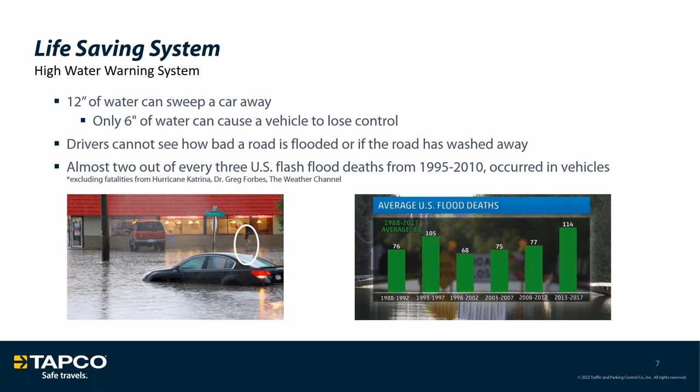We see water-like concerns happening in multiple areas and multiple types of entry points to the roadway. Barrier islands, areas of inadequate drainage, underpasses and overpasses, any low-lying condition along the roadway is a potential high water hazard. These areas not only cause vehicular damage and are maintenance concerns for those managing infrastructure.

Owning some of these areas within your municipality offers limited EMS response time, limited response time from law enforcement. There's costs associated and maintenance associated to the deployment of static measures like traffic cones and gates. Oftentimes we're seeing municipalities hit with higher insurance rates trying to manage the events that occur specifically in these areas.

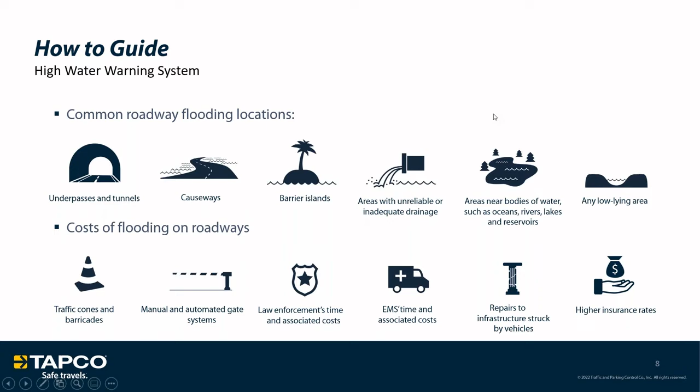To offset some of these concerns, TAPCO has developed a mitigation tool we call our high water warning system. These warning systems are countermeasures that can work conjunctively with cones, gates, barriers, and static measures, but also operate as isolated, conspicuous warning systems that work autonomously to alert drivers of water entering the roadway and a plausible concern for them as they engage with those types of events. They can also include automated gate arms and other advanced features that further mitigate drivers from entering areas of high water concern.

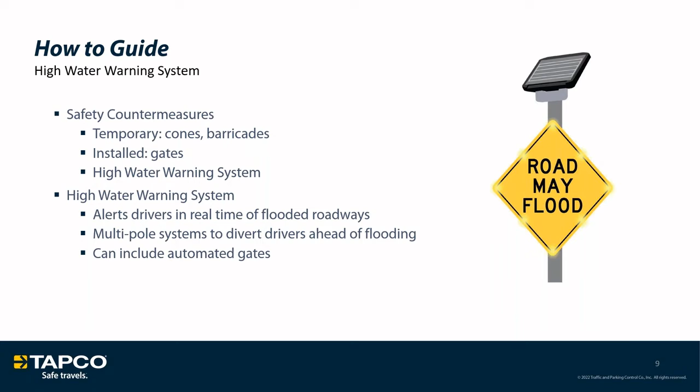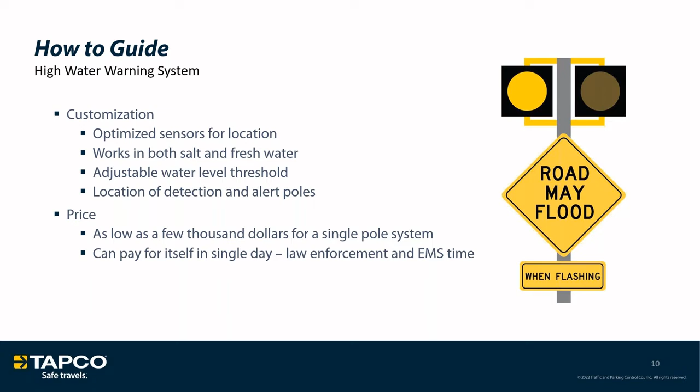These systems are completely customizable, allowing the deployment of a sensor right-sized to the specific application, working in both fresh and salt water with adjustable water levels associated to them. We can make sure that we're concerning ourselves with detection of water entering a roadway specific to what is the municipality's direct concern, and we can work within the confines of whatever price is best discerned for that particular project. These systems are right-sized to fit the needs of the municipality and make sure that we're addressing the concerns that are most important to that particular end user.

TAPCO's high water warning system is generally comprised of 2 separate pole types, as both a warning portion of the system and a detection portion of the system. As you can see in the graphic to the right, there is 1 pole generally stationed at the area of water intrusion to the roadway. This particular pole will have a sensor on it and be either powered via a solar panel and solar engine or available AC power. Communication from that pole to the associated warning poles will be done via either a hardwire communication or the available TAPCO 900 megahertz frequency hopping radio. That radio trigger will illuminate warning signs that alert the driver specifically that they're entering an area of concern.

Road may flood warning or warning messages will be displayed on those signs, or any particular type of warning message that would be pertinent to that area of concern. TAPCO has the ability to offer fully customized signs displaying any warning message that would be pertinent to your particular use case.

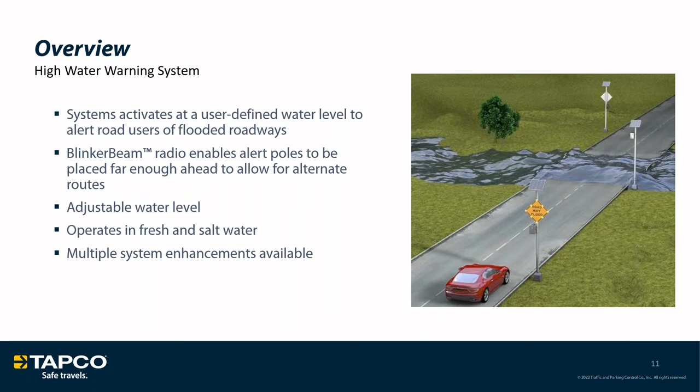In further detail for these poles and the way that the system is laid out, we're able to show a little bit more about the infrastructure layout. As I mentioned, there is at least one alert pole or warning pole associated to the system, and at least one detection pole associated to the system. Typically, TAPCO manages entry to that area of high water concern from multiple points and multiple angles. We know that a single road may have at least 2 entry points to that area of concern, but oftentimes municipalities are dealing with detection of a low-lying area with multiple inlets. Via the 900 megahertz radio network TAPCO provisions our system with, we can activate multiple warning poles without concern, managing every inlet to an area and mitigating drivers from entering hazardous conditions.

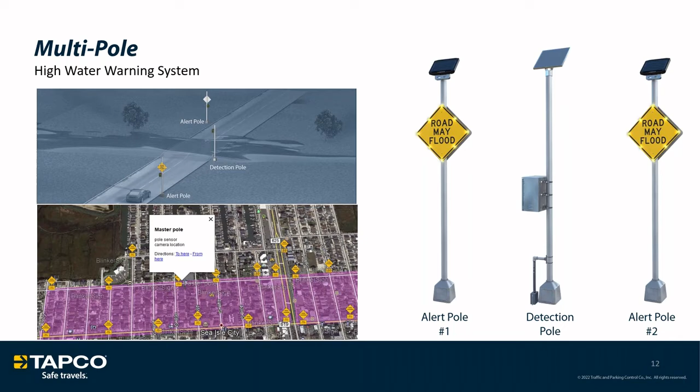TAPCO's sensor is housed in a flexibly deployable housing with a telescopic arm, stakes for mounting within the ground, and a fully enclosed container. This layout specifically allows us to manage water concerns at varying heights along the roadway, able to detect water at whatever the concern level happens to be for that particular municipality.

Oftentimes we're detecting water right alongside the roadway, but in some unique cases, we can understand based on trends and data and historical understanding of events that water of a certain height concern at a low-lying area adjacent to the roadway may be cause for the water to subsequently enter the roadway or cause other outlying concerns. Our ability to flexibly mount poles wherever that concern happens to be at varying heights and in varying layouts is giving us cause for early warning, giving us the ability to detect water as our earliest option to make sure that we're responding accurately to events as they occur.

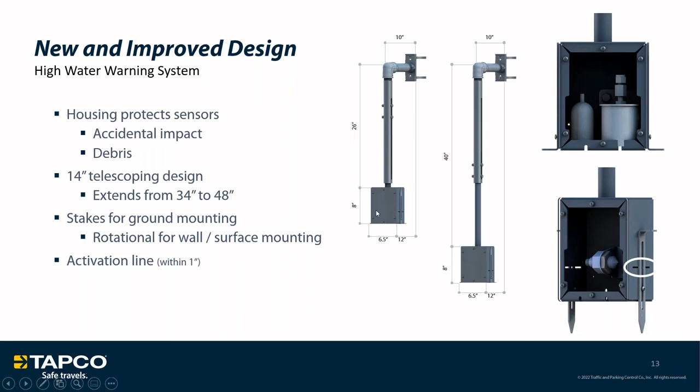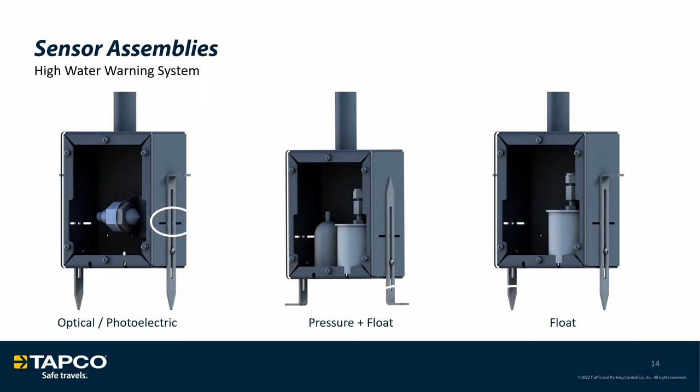TAPCO has 3 variations of our sensor for detecting water as it enters a roadway or as it enters our housing on our system. First, we have a photoelectric optical sensor, but we also offer a pressure float sensor and then the isolated float sensor. A little more detail regarding these sensors.

With our photoelectric sensor, we're able to measure the refraction of light as it enters the water, as it is under the water, and seeing that increased refraction of that light will trigger the system. This system is subject to some salinity from salt water, so it's best used in freshwater situations where any salt caking or developing on that sensor will be minimized. Additionally, we also have options specifically allocated for salt water using a mechanical float switch.

To address concerns regarding freezing or ice damming, TAPCO is able to use pressure switch options that help understand the variable pressure associated with water entering a chamber, and they work best in cold weather climates, working for salt water or fresh water all the same.

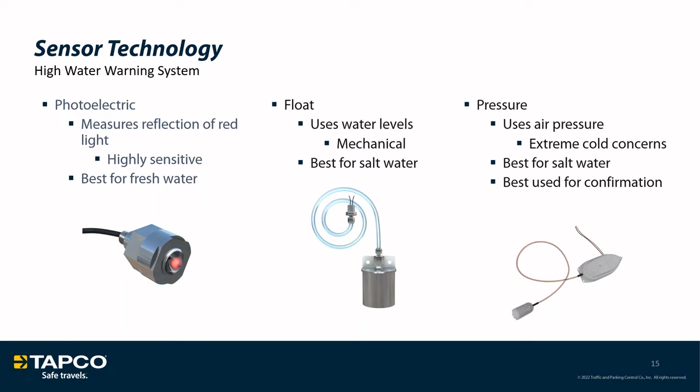This also helps mitigate concerns regarding contamination of water, if there should be debris or other things that accumulate within the system. Rightsizing our technology will use any one of these or a combination of sensors to make sure we're allocating a system best served for your particular project, addressing concerns about maintaining accurate and actionable detection, but also environmental factors that could compromise the system.

Available with the TAPCO system are a myriad of enhancements, specifically the ability to remotely activate and monitor these systems via connectivity where applicable.

We're interested in understanding the agency's adoption of this technology, and we would welcome a conversation regarding how to make this system as actionable and reliable as possible for those that aren't necessarily along the roadway. We want it to be managed remotely when possible, and to offer guidance about how the system is performing in its best possible state.

This can be done via TAPCO's proprietary BlinkLink software or with integration into existing IT infrastructure deployed within the municipality. Additionally, cameras and illuminators can offer visualization of these events, offering not only pictures, but also casting light onto the images to make sure we're seeing accurate depictions of what the continued change for high water looks like as that event progresses and as rains and other things continue to accumulate.

Lastly, we're able to integrate all of TAPCO's systems into connected vehicle infrastructure. We do this by offering an intermediary device that communicates from our 900 megahertz radio out to a roadside unit, should one be deployed. This simple add-on allows for conspicuous warnings associated with high water and other events to be displayed directly in the infotainment system inside of that vehicle.

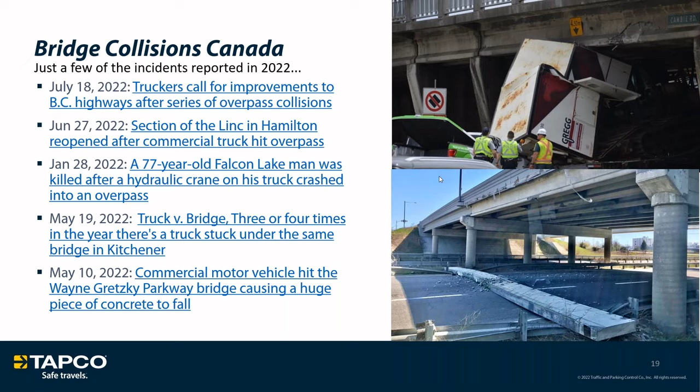So, of course, we realize that there is a problem with exactly everything that Mike just walked you through. Currently here in the US, we have about 10,000 annual bridge impacts nationally on a year-to-year basis. We do have over 600,000 bridges here currently registered, whereas I believe you have just shy of about 52,000 publicly registered there in Canada. 30 of our states have recognized bridge impacts as a major problem, but of course overheight impacts are a global issue.

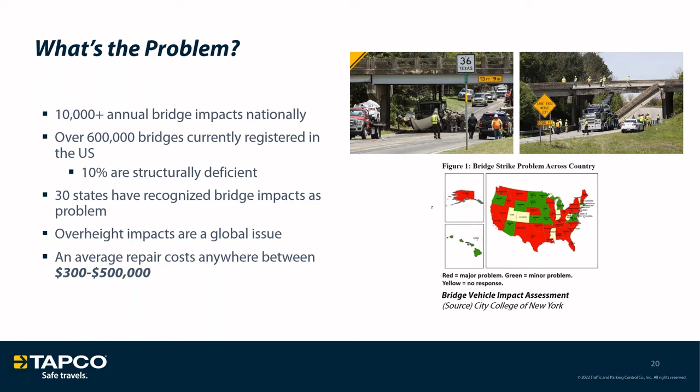There's bridges everywhere, really causing an issue with repair costs, which could be anywhere from $300,000 to $500,000 on average.

The reason being is that about roughly 40% of truck drivers that we had surveyed had admitted to not knowing the specific height of their own truckload. So a lot of them are using passenger-based off-the-shelf navigation systems, not super familiar with them or how to utilize them. Lack of route planning.

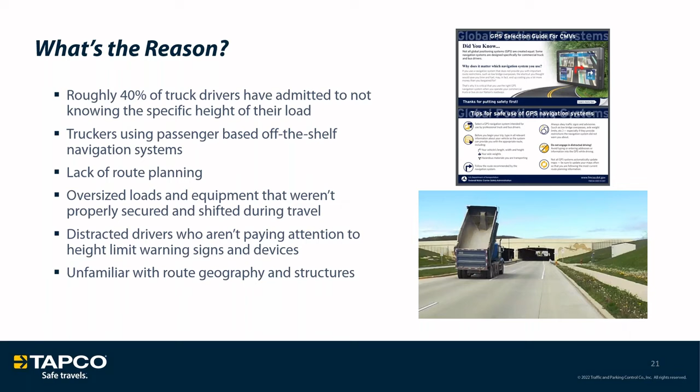They may have oversized loads and equipment that weren't properly secured and could have shifted during their travel. Sometimes they're just merely distracted, especially if they're not paying attention to the height limit warning signs, or if they take the same route repetitively, sometimes those static signs can just become white noise. Or maybe they're just unfamiliar with the route geography and the structures in general.

But this could cause major impact consequences. So of course, the most important is injury or loss of life to either the driver or the nearby motorists. The damage to the infrastructure, like we discussed, the interruption of commerce, which now that truck is missing their deadlines for delivery, increasing shipping costs, delaying the travel times, wasting fuel, money, resources.

Of course, the local evacuations that are required. So if those trucks are carrying hazardous or harmful substances that are released during the impact, then that creates, of course, a new issue all in its own. The company and driver fines that come along with it, and then of course the increases in insurance premiums, and then the costs of those goods.

TAPCO's preventative measure is our overheight warning system with either flashing blinker signs or blinker beacons. 73% of the states here that have installed an overheight detection system have seen a reduction in the frequency of their infrastructure strikes. So the photo example that you see off to the right, this is a flashing blinker sign, where it reads, of course, the height of the upcoming bridge or structure. And it also specifically highlights overheight when flashing.

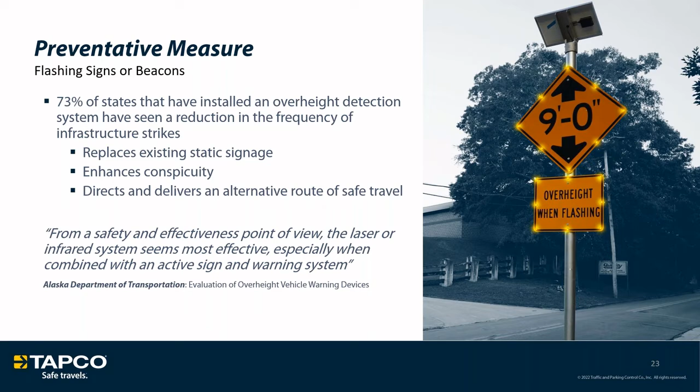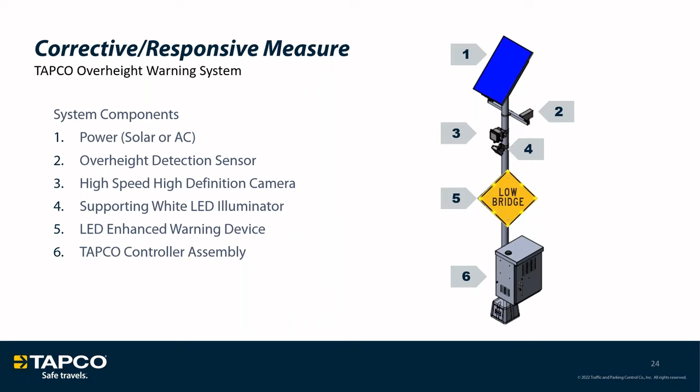The supporting white LED illuminator really helps to highlight that camera system if deployed in nighttime conditions. The next down is, of course, that LED enhanced warning device, whether we utilize a blinker sign or blinker beacons. And then at the bottom there is the TAPCO controller assembly, where, of course, the brains of the system are housed.

So we utilize a dual beam configured overheight infrared sensor. It does provide directional logic, so the vehicle would need to break the beam directionally, one before the other, in order to trigger the system. That really reduces the false triggers that could be deployed with potentially a single beam sensor. It does offer multi-lane compatibility, so you can actually deploy these on highway applications as well. It offers 150 feet of range between them.

It does utilize 12-volt power. It is solar capable, as we mentioned before. The adjustable sensor sensitivity is customizable, as is the detection height. So of course we can utilize this at any height that is needed for your particular project.

The ideal speed limits are at or below 85 miles per hour, so again, available all the way up to those highway applications. It does have a 2-inch window for accurate detection, and it does have built-in lens heaters to prevent condensation or icing in those cold weather scenarios.

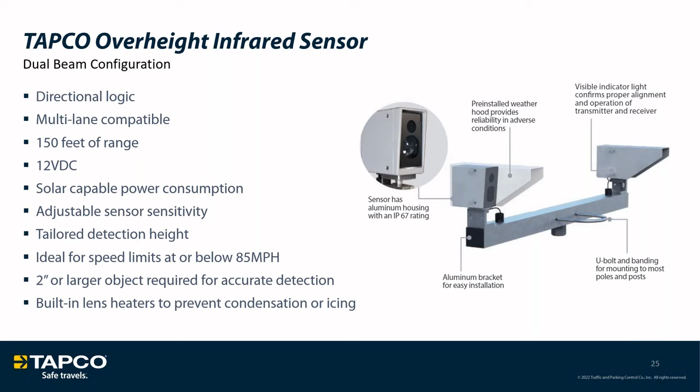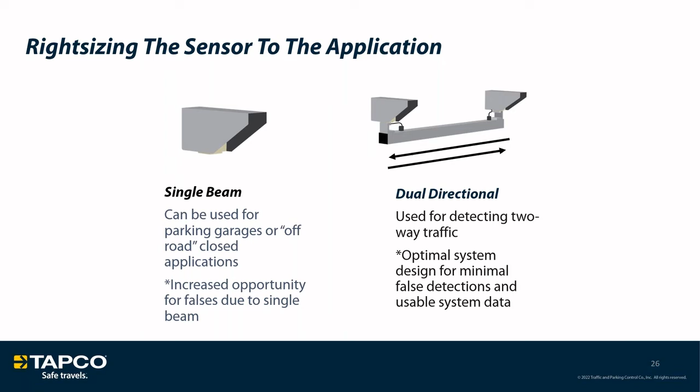Now, of course, we want to right size the sensor to the application, so sometimes that dual directional is not what you would need. In other instances or projects such as parking garages or maybe off-road closed applications, a lot of private industry, sometimes we just utilize a single beam sensor because you don't necessarily need to know which direction the vehicle is going. So again, completely customizable to whatever project you would need. This gives you a good overview of how the system would look deployed on a roadway.

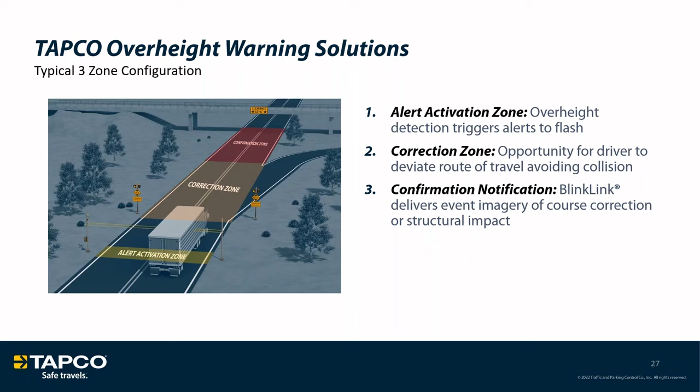Now, many times we will also offer a confirmation zone with an additional system to really confirm that either the truck continued on for whatever reason, or just for your own knowledge and data collection to confirm any repeat offenders.

We do have multiple customizable abilities with this system. The very basic of our system options is our 24/7 or dusk to dawn application, which is the LED enhanced treatment or warning sign. It does offer limited deterrent capabilities, but it doesn't offer any connection or interaction necessarily with the driver.

Then we also offer the activated alert system - that's really what we've been discussing thus far. That's the entry-level overheight detection solution with the dual beam infrared sensor technology. It will activate based on a driver's presence and breaking of that beam.

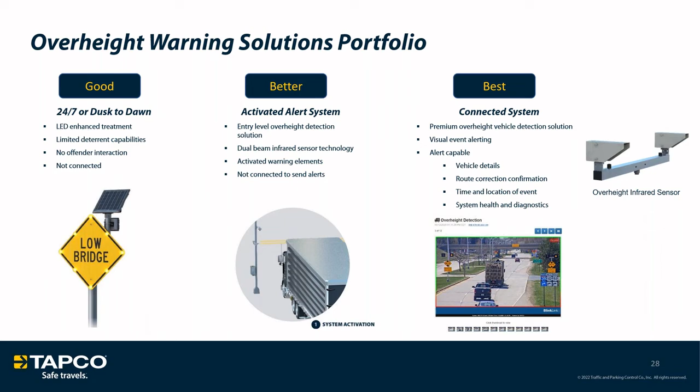But we also offer connected systems as well, which offer visual event alerting. That BlinkLink software system that Alex mentioned earlier does offer the ability to add on to this particular system. So you're able to get all the vehicle details of anyone who has approached that bridge or needed to route correct. It offers the time and location of the event, and also the system health and diagnostics.

There are many ways to deploy these systems - not just public roadways where you'll have a bridge overpass or maybe a railway crossing, but also private industry, such as industrial campuses, parking garages, or airports.

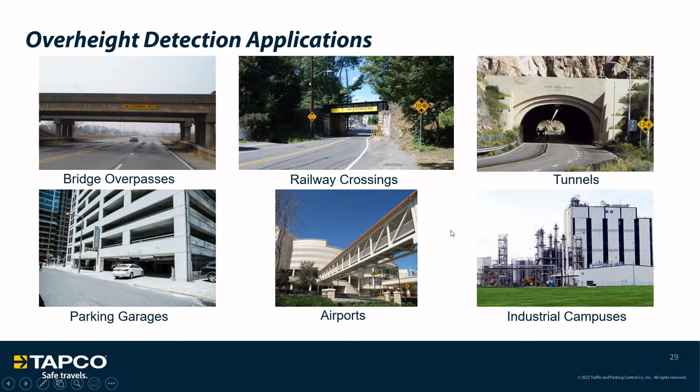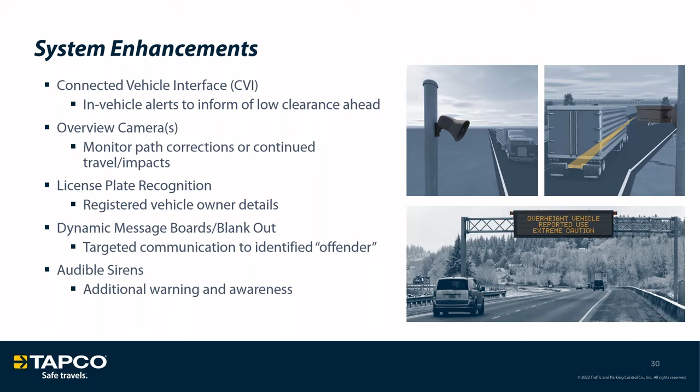There are many system enhancements, similar to what Alex mentioned before, with the connected vehicle interface - it can actually alert the driver from inside the vehicle, removing all ability for them to not see the upcoming obstruction. It also offers overview cameras, license plate recognition, dynamic message boards for customizing your message to drivers on a mast arm overhead, and audible sirens to alert drivers via an audio signal.

The TAPCO Advantage is really a turnkey experience. From design to manufacturing and installation, you have constant support - a very large team behind you and a lot of experience.

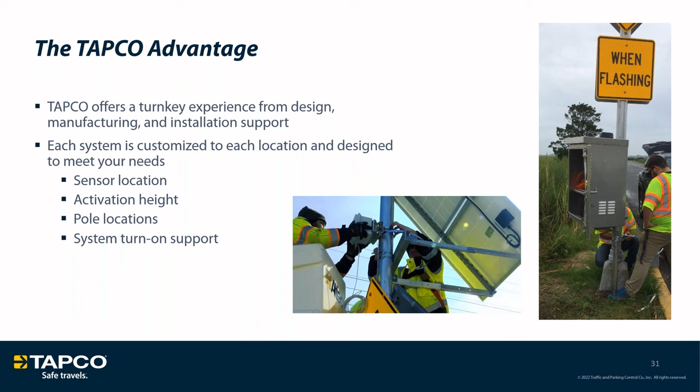Each system is completely customizable, customized to each location, and designed to meet your specific needs. We'll come check out each specific location before deployment, to make sure we have information on the sensor location, the activation height needed, and pole locations. TAPCO will actually deploy a specific team to come and offer on-site support for installation as well.

That is it for Overheight. Does anyone have any questions?